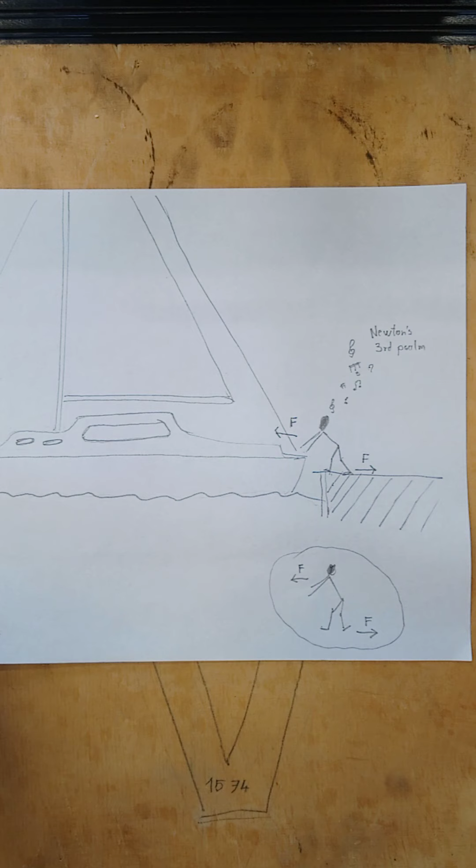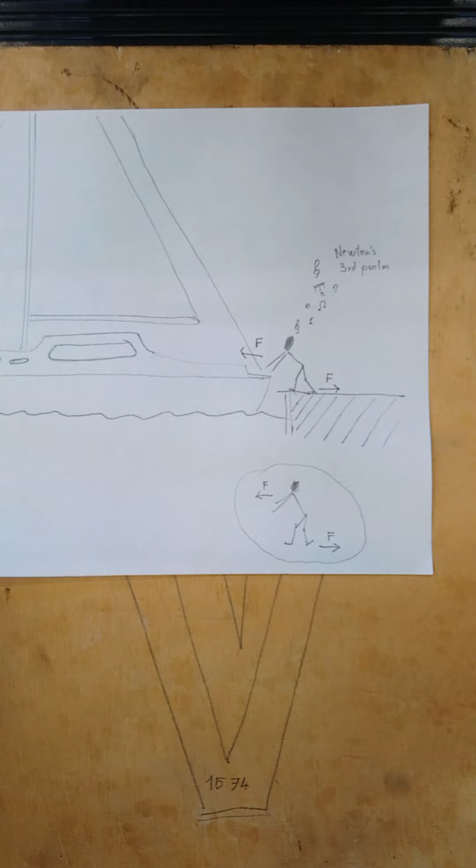Let's start from a situation that we all know. If you want to move our boat while we stand on the land, we would feel the force that we use to push the boat in our hands, but also the same force we would feel within our feet. That's according to Newton's third law, action-reaction, and they would be equal.

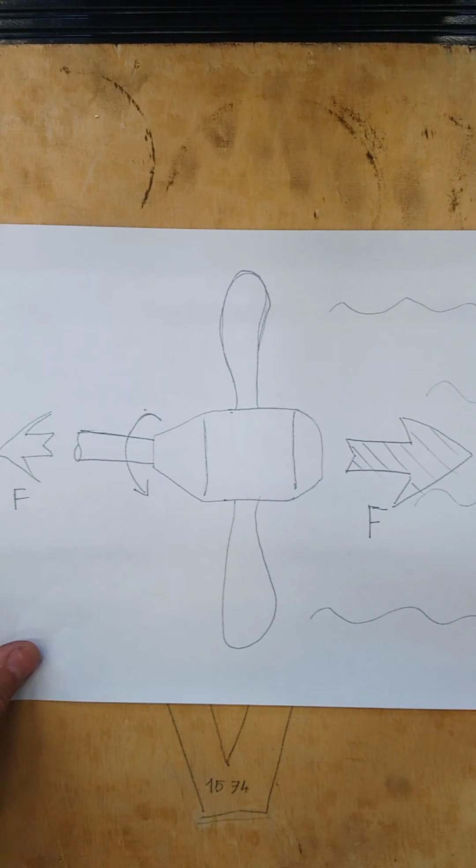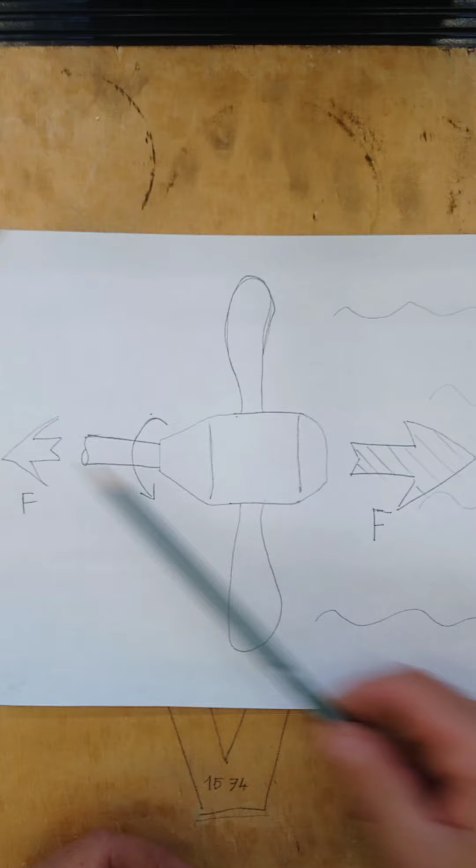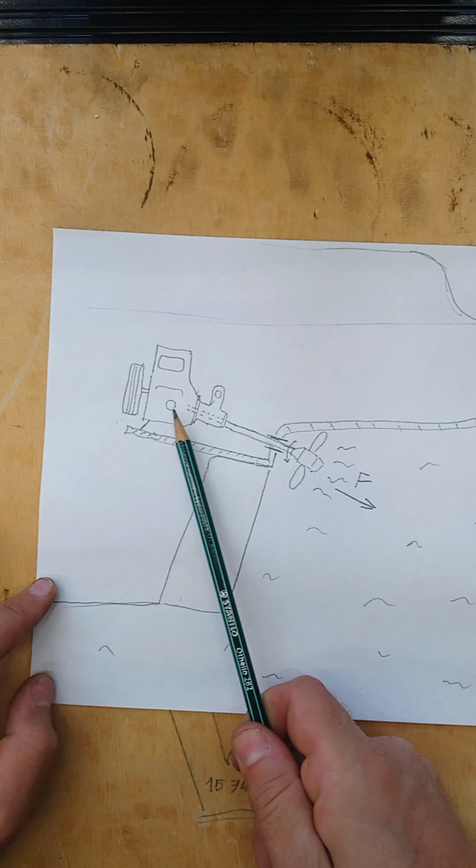The same applies to the propeller. When the propeller is rotating, it generates a force against the water, and then it's sending the force through the rotating shaft towards the boat, where it goes further. Of course, it goes to the engine, and then through the engine mount, it goes to the hull of the boat.

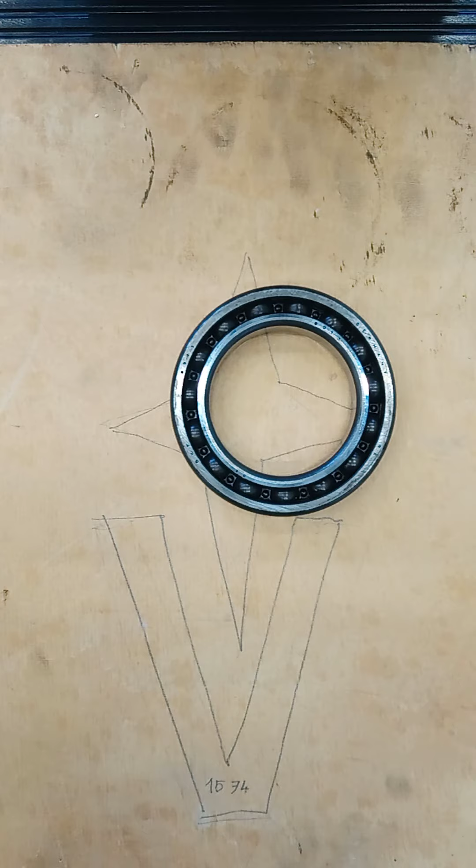The shaft is rotating, the engine is not rotating in general, so there must be an interface between the rotary and the stationary parts. That interface is called the bearing, and I would like to speak more about that part. So that's the bearing we are speaking of. And let's see how it looks in our particular case.

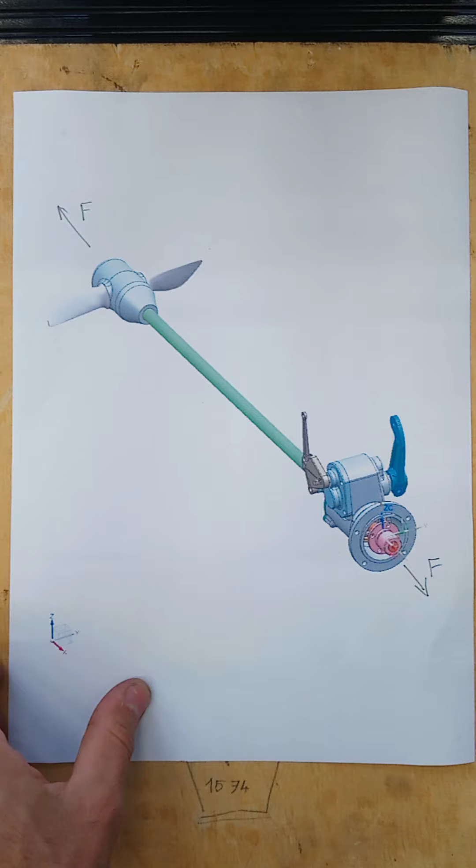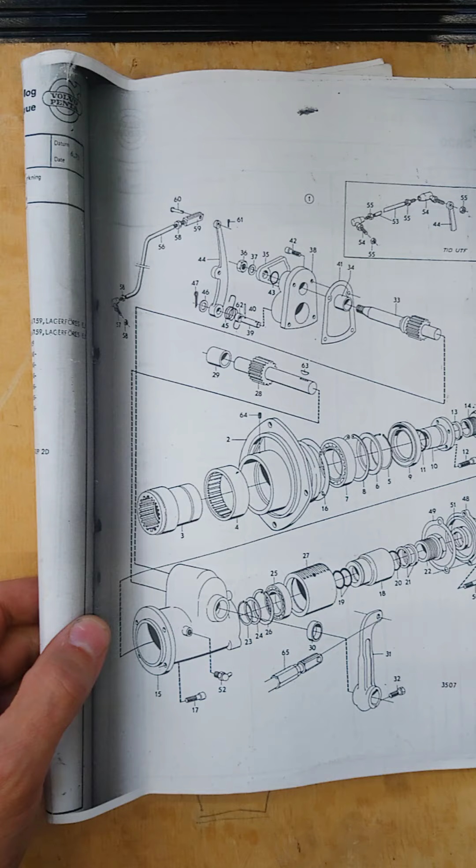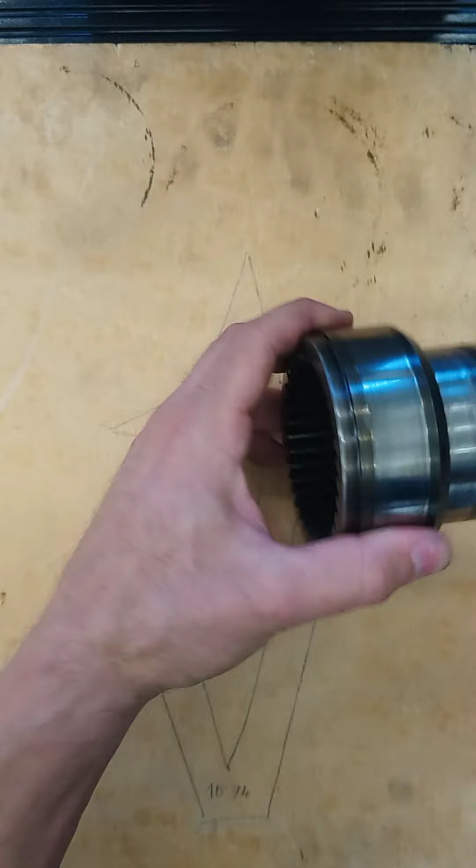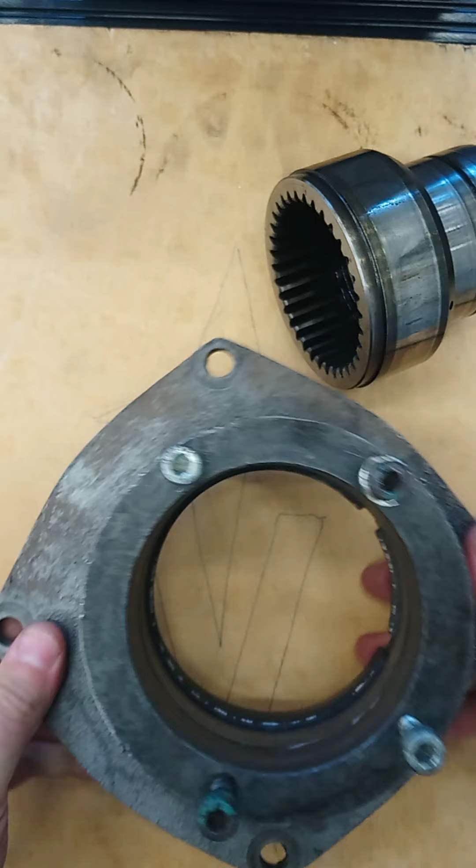In reality, that part looks like this. And here are the mounting holes for the flange. There are two bearings holding that part, and this is rotating, right? So this is still rotating, and the stationary part receiving it is this one. You might know it looking from outside at your engine. You might remember it well. And the interface between those is two bearings. One is this one.

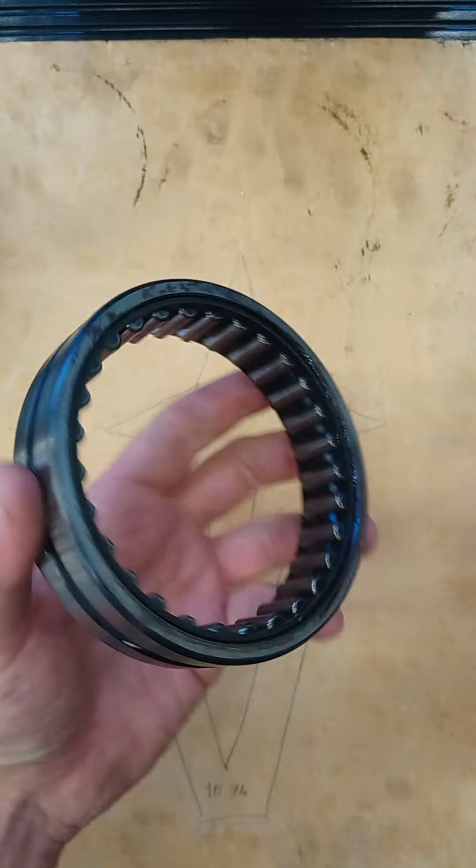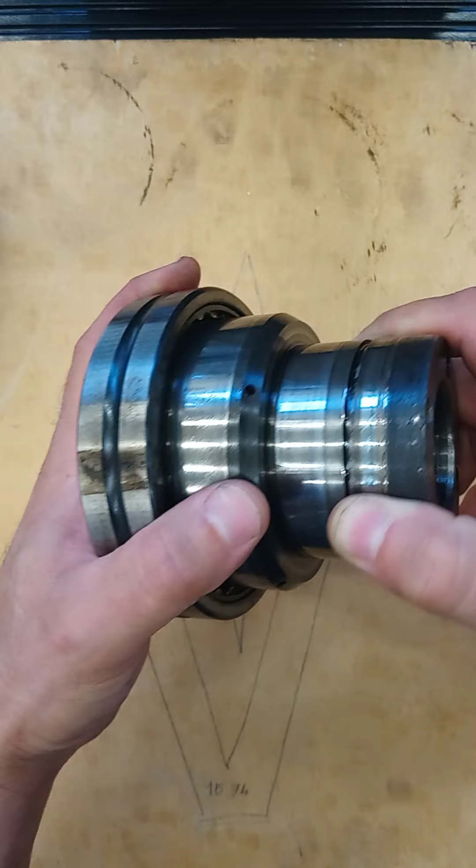I have to mention that's the craziest part in our engine. So if I would manufacture anything from the engine, this one would be the craziest, I think. Or maybe some of the castings, whatever. So if we assemble this, it's not that easy. Okay, you see, I'm able to slide it actually. So is that bearing capable of transferring any actual force?

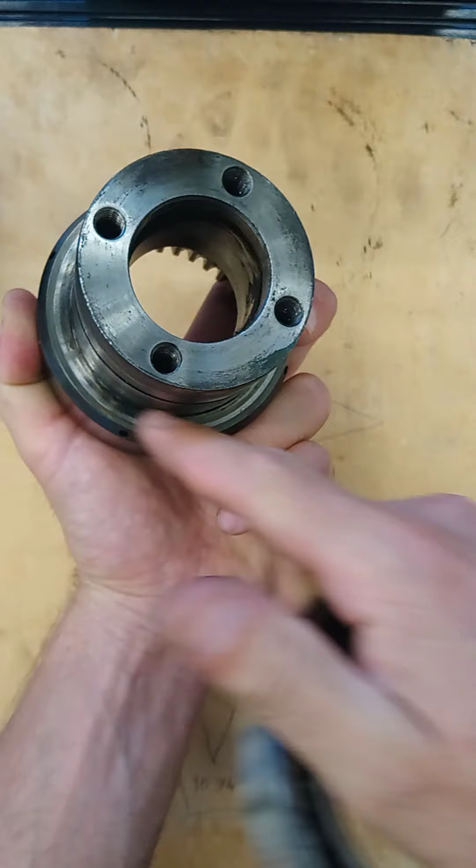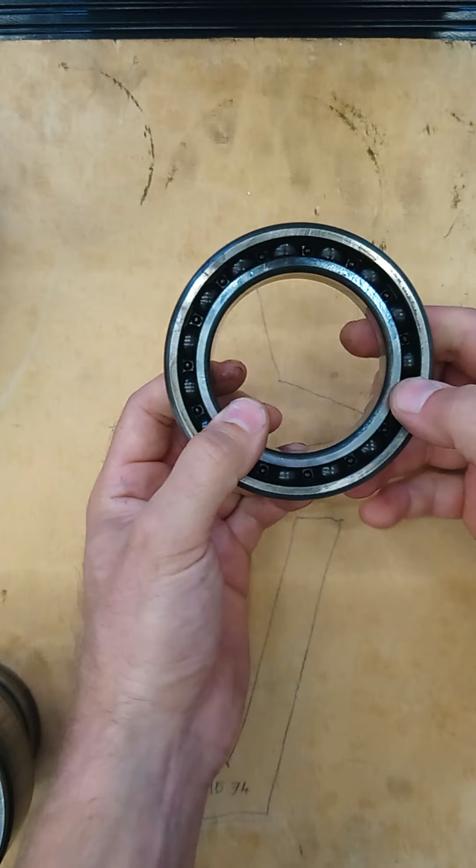Obviously not. We have another bearing, this one. Luckily, and it comes here, right? I won't assemble it now, but it goes here. Here you can see the mark that it made due to the axial force on the part. Luckily, this one is a replaceable, standardized bearing. Its number is 6013. I already bought some new bearings, here you can see, and I will replace this one because it's noisy, and also I feel some not continuous things like ticks during the rotation. Okay, so that bearing transfers all the load that pulls our boat forward.

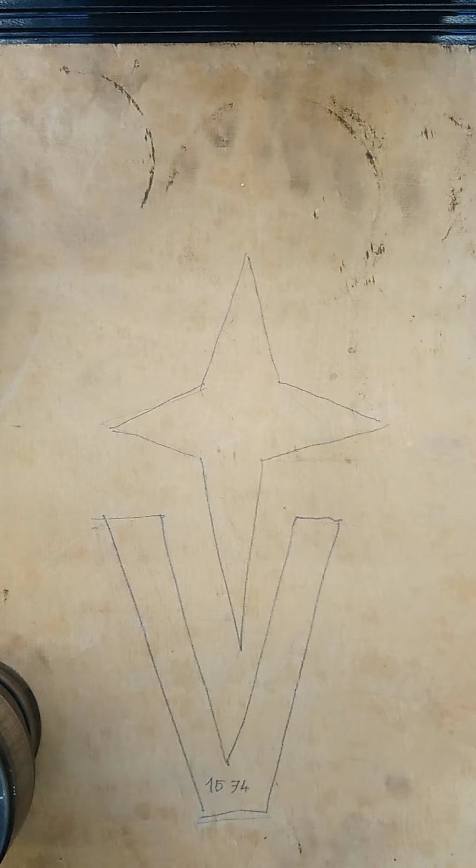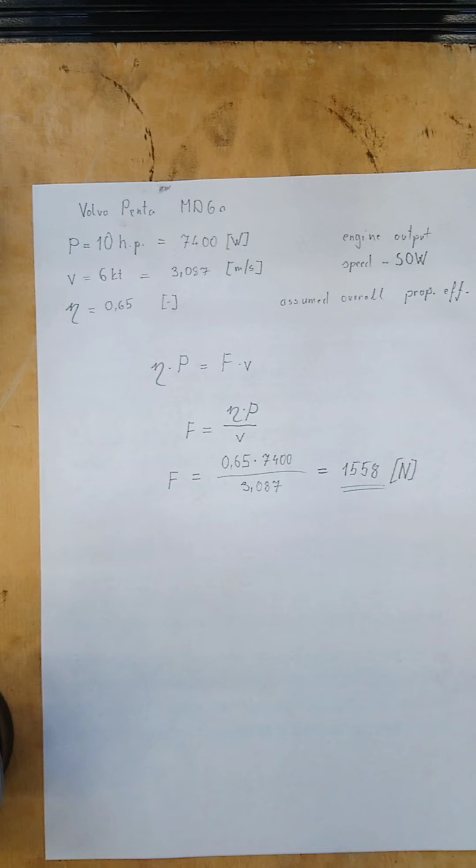Now let's think about it, how much that force can be. Here is a short calculation. So our MD6 is 10 horsepower, which stands for 7,400 watts. Let's say we travel at 6 knots. That's about 3 meters per second. Of course, there are a lot of losses in the propulsion, and also the direction of the propulsion is not always horizontal. Usually it's not perfectly horizontal, so we have losses from the direction of the force too.

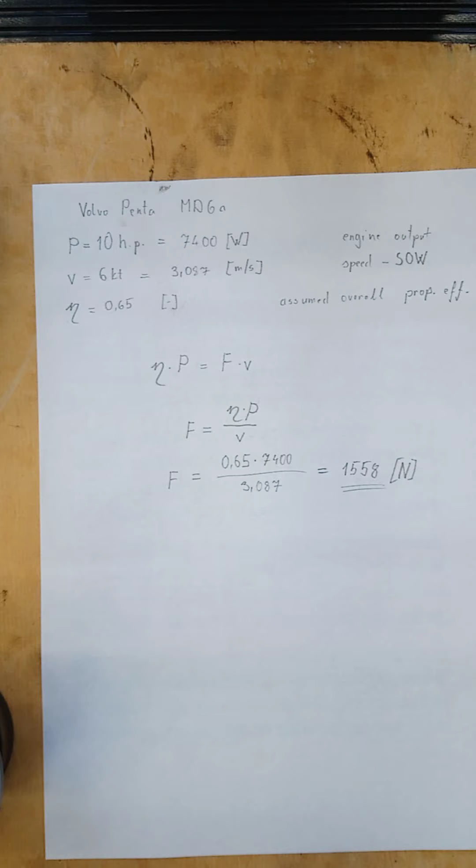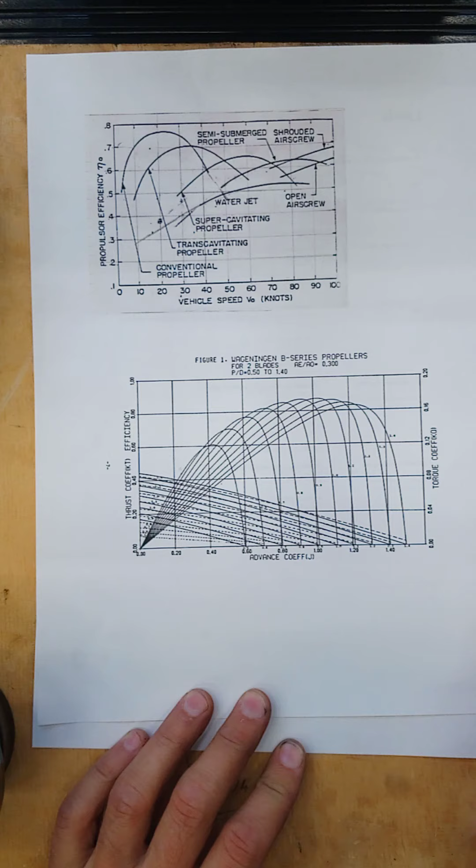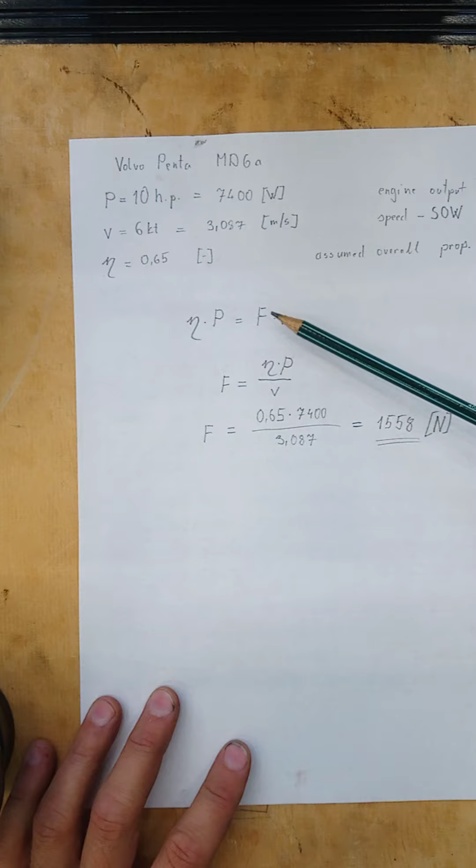And the propulsion itself has its own efficiency, which depends on the rotation speed of the propeller, and of course the geometry of the propeller. Here are some examples from the internet. So based on this one, let's assume that our propeller would be somewhere, let's say 65% efficiency. Okay, so following the calculation, here is the power output reduced by the efficiency equals force times speed. After doing the math, we get 1558 newtons. Well, obviously it's much more than we would use in that situation, but remember that the drag force around the hull is increasing rapidly with the speed, so we would need definitely much more force to develop 6 knot speed.

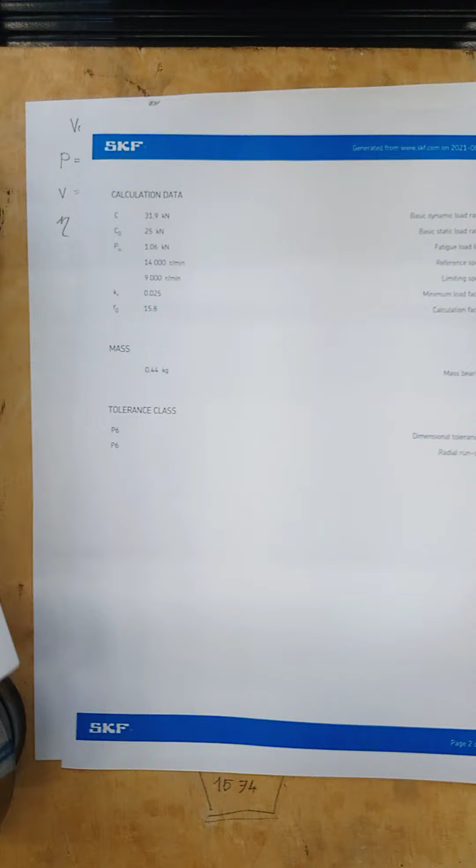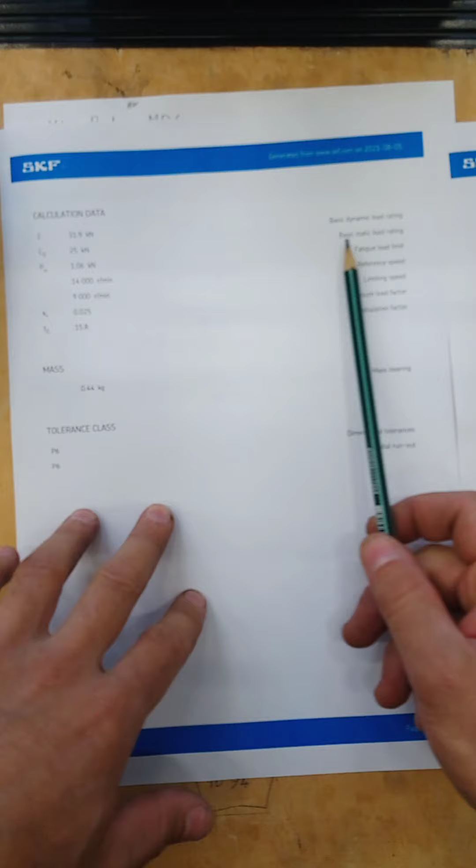Okay, now let's think about what such a force means for that particular bearing. If you go to the SKF website, you have the data sheet of the bearing, and they would present you different calculations regarding that bearing. And there is something like basic static load rating. We'll be looking at that further. Oh, it might be difficult to read. I'm sorry about that.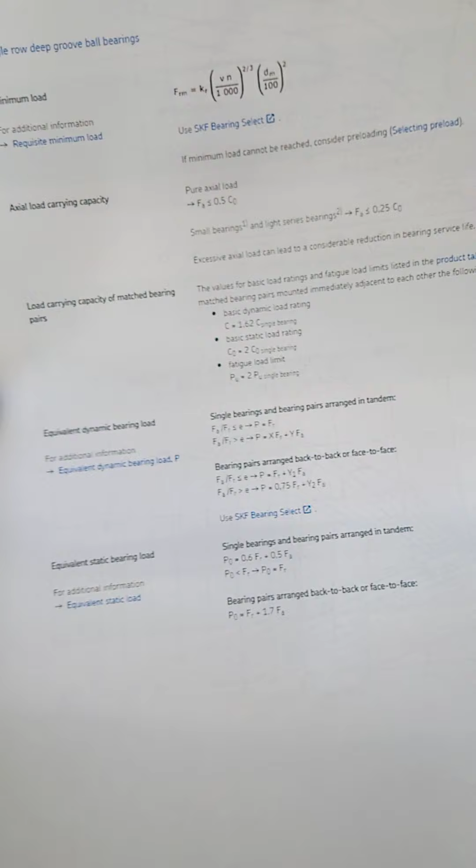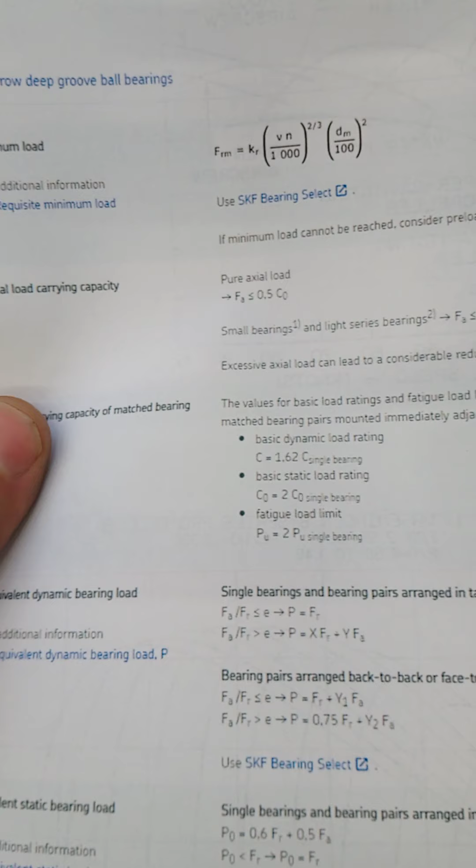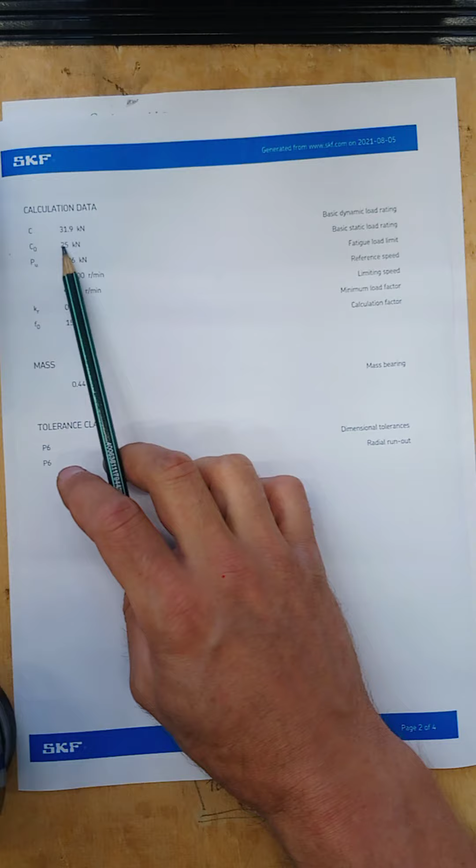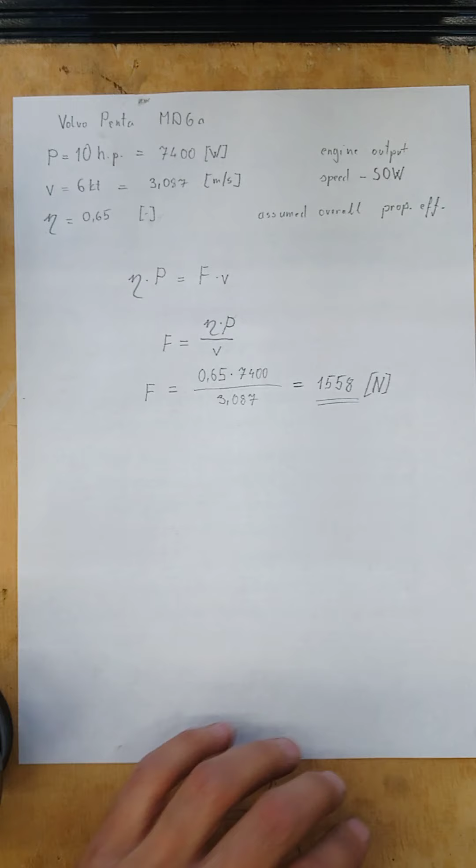Now let's neglect the force from the planetary gear that makes the radial load on the bearing and just consider our axial bearing load that comes from the propeller. So pure axial load needs to be less than half of the C0 parameter. C0 here is 25 kilonewtons, 25,000 newtons. Half of that is 12.5. So it means that we are roughly around 10% of the allowable static load.

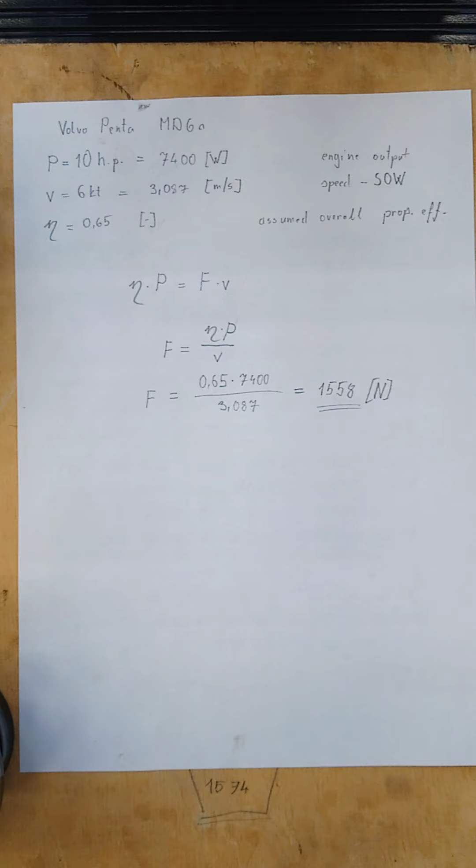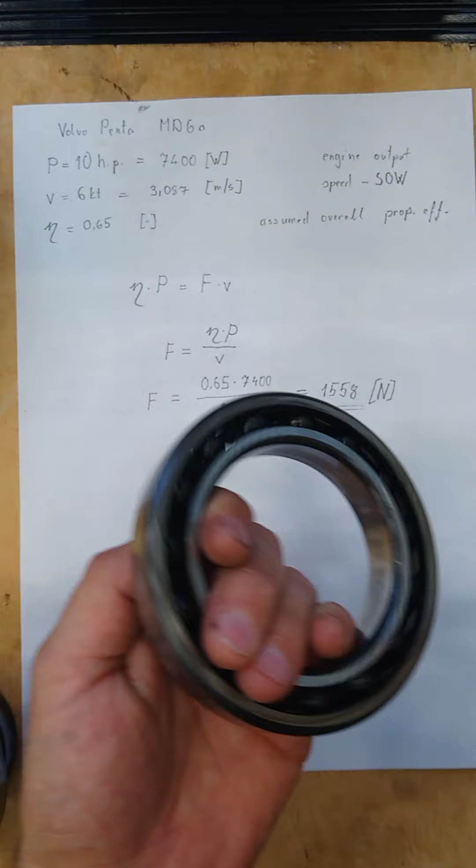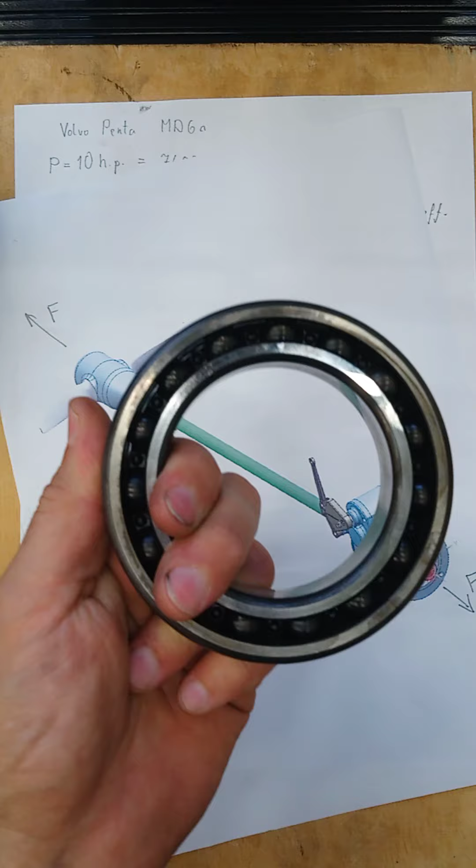Does it seem to be able to wear out our bearings? Not really soon. I believe that the factor that might affect my bearing was contaminated oil in the engine, as those are lubricated by the oil, or maybe some hammering on the end of the shaft, as everything you make here would go straight to the engine and affect this bearing. It's not really expensive, but it's worth to pay a lot of attention to it and replace if necessary and if you have that possibility.